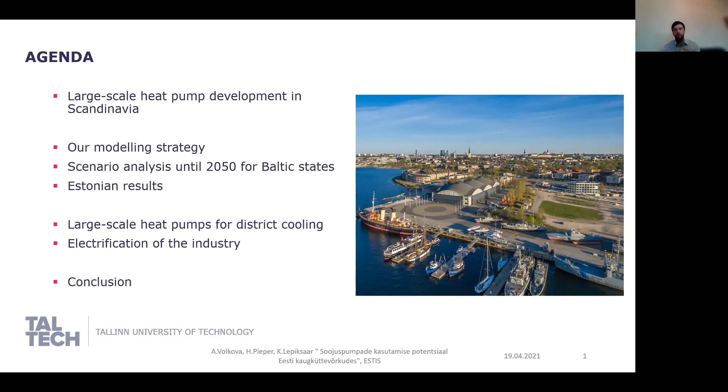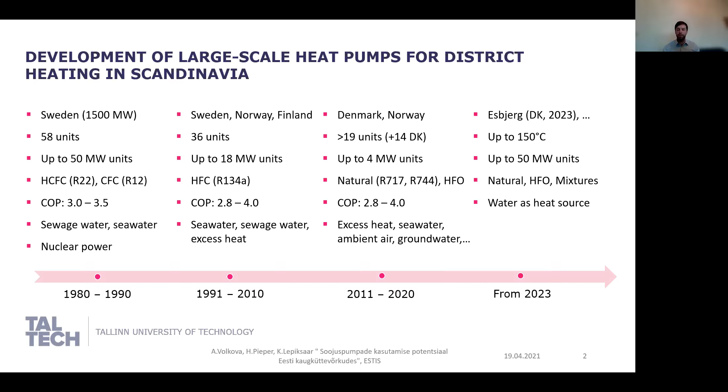And from 2023, more or less, we can expect a new generation of heat pumps, because there are some new compressor types. For instance, in Esbjerg, a city in Denmark, they are planning to replace the coal-fired CHP by 2023 with a 50 megawatt seawater heat pump, using ammonia as a refrigerant and seawater as a heat source. And this, just from the individual single unit, will increase the capacity and the possibilities for heat pumps quite a lot in the future.

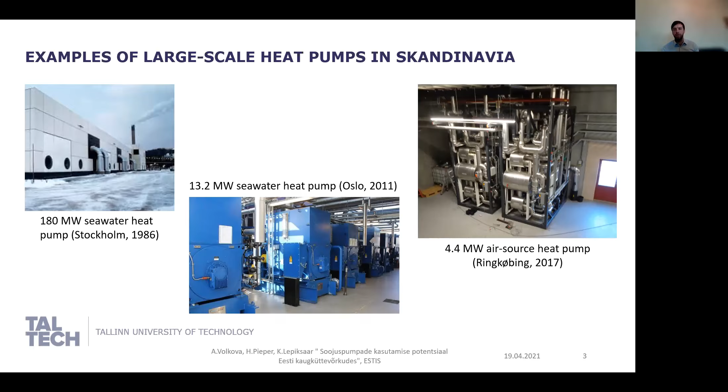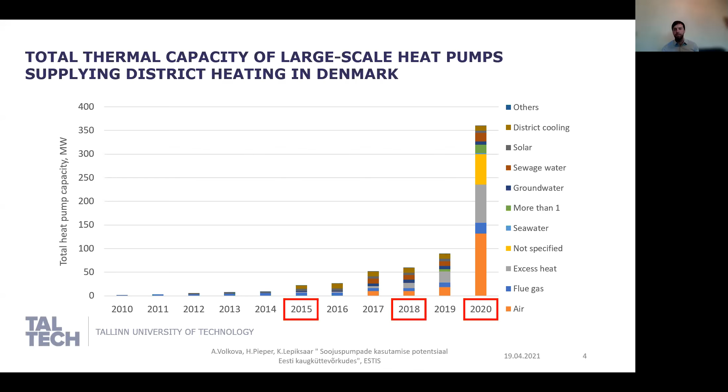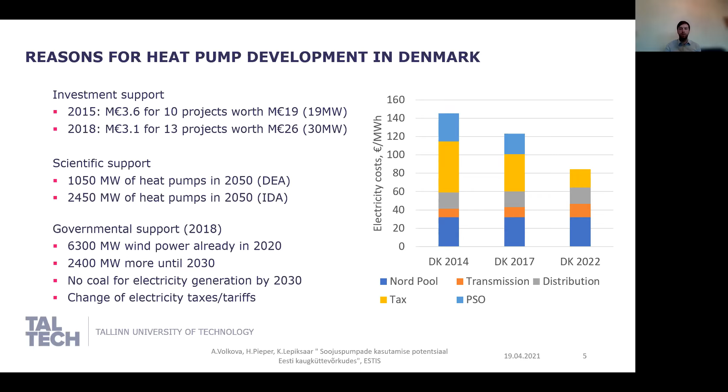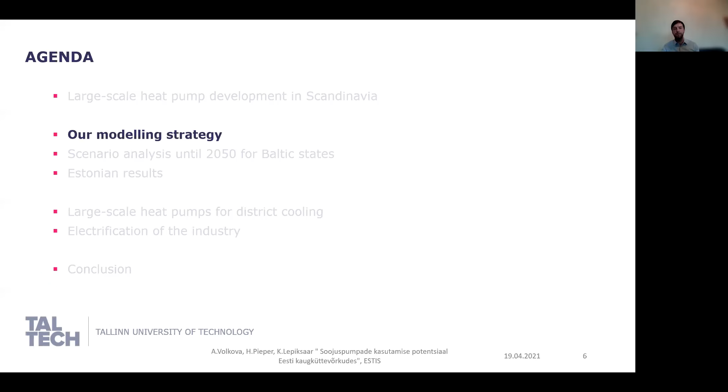So this was about Scandinavia and Denmark. Now I'm going to talk a little bit about the methods and the results from our heat pump report. So our modeling strategy was to analyze the competitiveness of large-scale heat pumps and various heat sources in district heating networks in the Baltic states.

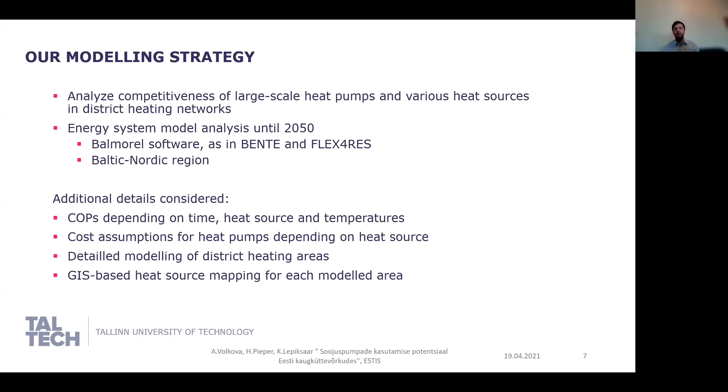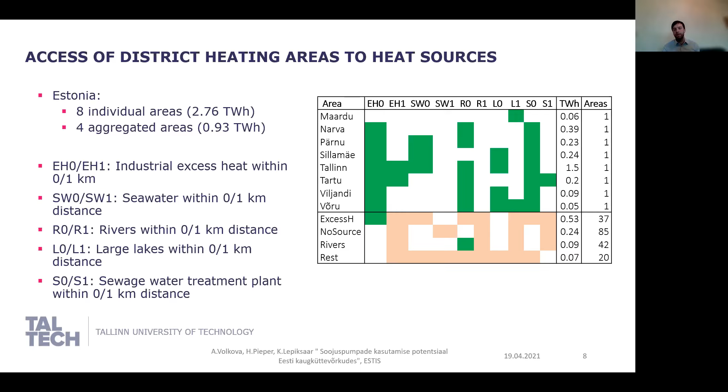So what we then did is we performed a scenario analysis. So we considered 3 different scenarios. The base scenario, which is a socio-economic competition of technologies without any taxes or tariffs applied. Then we had 2 other scenarios. One is the grid tariff scenario, where we consider current electricity grid tariffs in the Baltic states. And then we had an invest support scenario, where we considered a 50% subsidy for new large-scale heat pump projects.

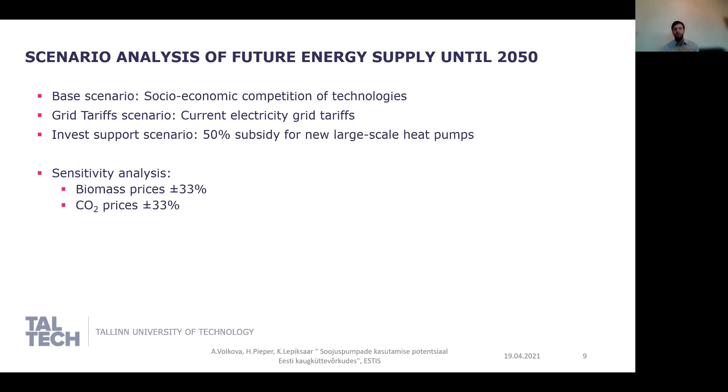We also saw this was one of the measures they used in Denmark, even though the subsidy support was not that large, but we just wanted to investigate how far you can actually go. And then in the sensitivity analysis, we performed variation in biomass and CO2 prices.

So now I'm going to present you the results for the Baltic states. Here you can see the total generated heat for all 3 countries. For the base scenario on the left, for the grid tariff scenario in the middle, and the invest support scenario on the right. And the generated heat from heat pumps you can see in the red boxes. And in the base scenario, this is a socio-economic comparison. By 2050, we expect to have around 54% of the heat supplied by large-scale heat pumps.

And then we can see for the grid tariff scenario, where we apply current grid tariffs, the share for heat pumps will get reduced quite a lot, down to 24%, because it's just so expensive that you would use biomass instead. And then in the extreme invest support scenario, we can see that up to 68% in the Baltic states of this heat could be supplied by large-scale heat pumps.

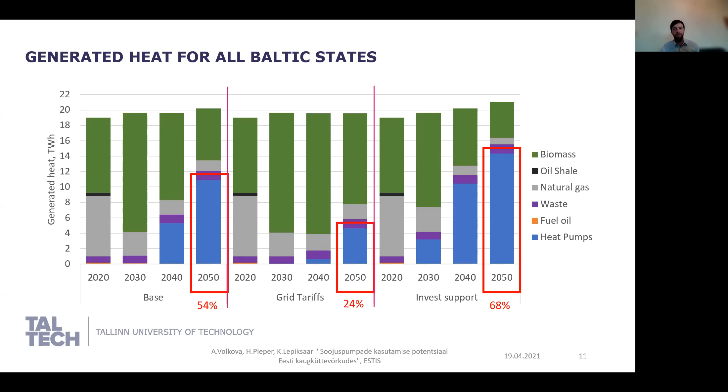And on the next slide, I will show you again these three bars for the supply of heat pumps, but I will just show you which heat sources should be used for that. So this is the same bars, just without all the other disturbing part of the biomass, etc., and waste heat and natural gas. So this is the supply by heat pumps, differentiated by the heat sources used. And the priority is somewhat listed on the right.

So excess heat, of course, due to its temperature and also proximity to the district heating network, has the highest priority actually to use, because you would gain the most, because you also achieve highest COPs, etc. However, the potential is somewhat limited compared to the heat demand in the Baltic states. So you can only maybe generate almost 1 terawatt hour of heat with that.

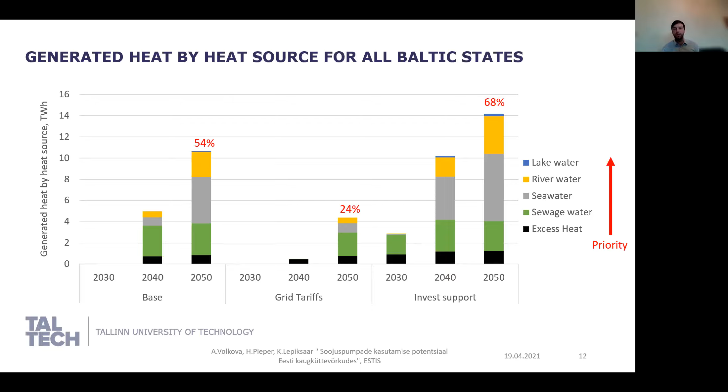And the next source that you should use or could use, because we have plenty of those available, are sewage water treatment plants. And you can see that already in 2040, most of the capacities is actually reached. And then in addition, it is seawater and river water that is used, depending on the location and availability of other heat sources. So in particular, seawater is used a lot, for instance, in the invest support scenario in 2050, covering a large share. And lakes is used very little. So these are more or less the heat sources that play an important role, which is excess heat to a limited extent, and then sewage water, seawater, and rivers.

This is now just the CO2 emissions from our calculations, how they would change. And this is for all three different scenarios in 2030, 40, and 50. And what you can see is that the invest support scenario, which had the highest share of heat pumps implemented, results also in the lowest CO2 emissions, which is good to see. So the heat pumps would also benefit sustainability. And on the other hand, the grid tariff scenario had still the highest share of CO2 emissions, where we had the lowest contribution of large-scale heat pumps.

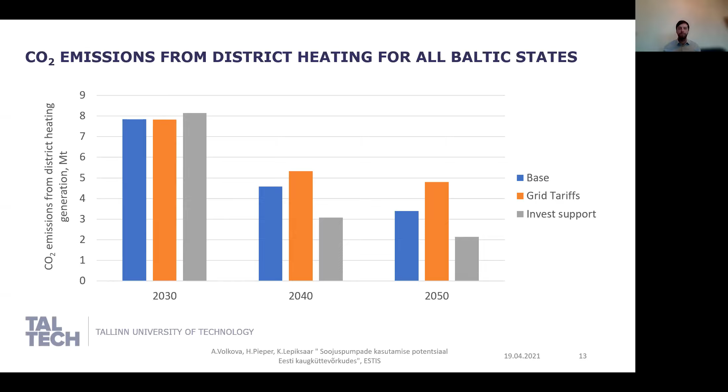Now I'm going to talk about the results just for Estonia. So here you can see a similar plot as before, just for Estonia, with generated heat of almost 4 terawatt hours. And the graph looks somewhat similar, at least the trend, but you can see, for instance, the heat pumps in the invest support scenario would cover quite a large share in 2050, and biomass would almost be not there anymore. Well, still some contribution.

But this is the invest support scenario, where it would be 3.4 terawatt hours that is suggested to be supplied by large-scale heat pumps. Whereas when you have the grid tariff scenario, it's 2 terawatt hours less. And for the base scenario, which considers a socio-economic competition, it would be 2.4 terawatt hours. So it's 2.4 terawatt hours from almost 4 terawatt hours. It's quite a large contribution, which shows that large-scale heat pumps will play a major role, or should play a major role, in the future.

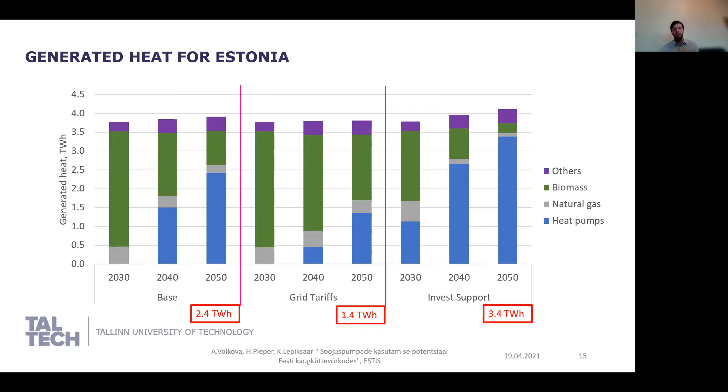Now I would like to show you a little bit the heat source usage in detail for the modeled areas in Estonia. So we have first our 8 individual networks, and then we have the 4 aggregated ones on the x-axis. Then it's heat source usage, how much of the heat source is used, and then with the COP, you get a factor of how much heat you could supply.

Tallinn has the largest share, and it has a large sewage water treatment plant, and of course, the proximity to seawater. That's the main two sources that are suggested to be used for Tallinn in 2050 for the base scenario.

Then we have a mix of sewage water and seawater for different cities. And then we have the excess heat group, where we have a large amount of excess heat that should be used. What I would like to show you are these two, Pärnu and the excess heat group, in a bit more detail in the next slides.

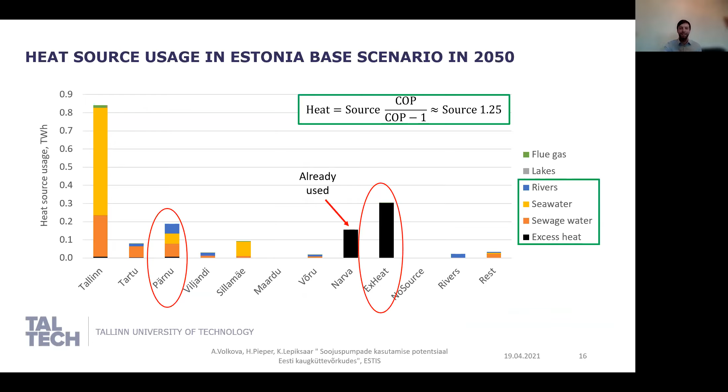You also do have some excess heat sources or boilers or CHPs, but they are not very large in capacity, and the potential of excess heat is not very large. So it would be mainly the river, the seawater, and sewage water.

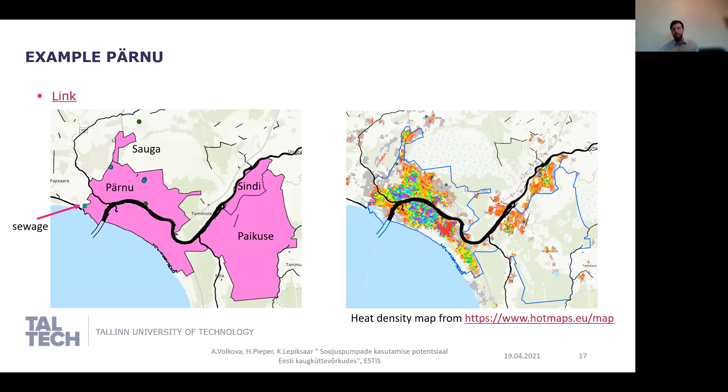However, if you look at Paikuse, you can see it's actually concentrated in two areas, and the other remaining area is just land or agriculture, where you don't actually have district heating, of course. But this is not shown in the GIS map. Just keep this in mind, that for rural areas, the distance can be larger.

Now I would like to show you the aggregated excess heat group, where we had these 37 district heating areas with an accumulated heat demand of around 520 gigawatt hours. And from these 37 district heating areas, there were 22 that had industrial excess heat sources within the district. All the others had only boilers or CHPs in the area of district heating. So these 22 district heating areas had a heat demand of 300 gigawatt hours.

And this is, in this case, the limiting factor, because actually we had 32 industries in all these 37 areas with an excess heat potential of 2,500 gigawatt hours. But since the demand was not large enough, only 300 gigawatt hours could be used.

And different sectors were involved, well, there's a large cement factory, then we have 8 asphalt sites, then we have the chemical sector, wood, food, and then some others. But these are more or less the main areas that were relevant for these 22 district heating areas.

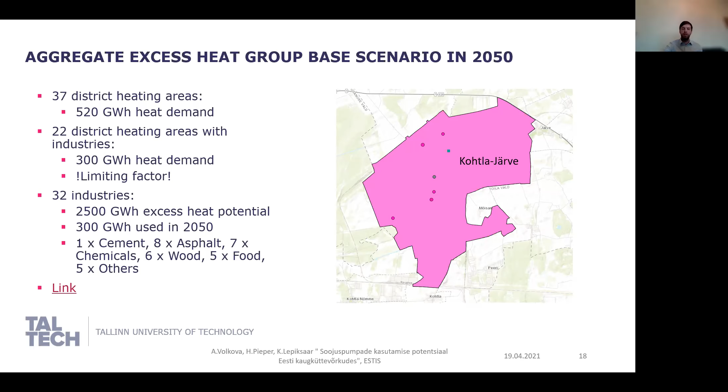Then I would just briefly explain a little bit about large-scale heat pumps for district cooling, and afterwards electrification of the industry. So it's just one example, also in Denmark, in Tårnby, they have...

realized a project where they have a heat pump that can supply 6.5 megawatts of heating and 4.3 megawatts of cooling. It received the Heat Pump of the Year 2020 award from the European Heat Pump Association. It's a win-win for district heating and district cooling clients, because you can share the costs of the investment and also the operation between the heating and cooling customers.

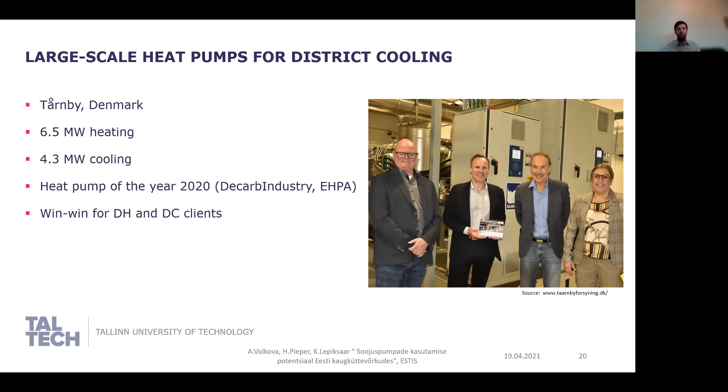District cooling is not new in Estonia. There have been projects that started in Tartu, and there are also plans and some construction in Tallinn.

In Tartu, you can see on the left the network that has been built, and next to it is the Hotmaps GIS map, which shows cooling demand densities. You can see there's actually a good fit between what has been realized and what has been mapped by this project.

For Tallinn, I did the same comparison. There are some 3 potential district cooling regions, and on the right you can see the district cooling potential based on these maps. This time it's maybe not the best fit, but the 60 megawatt area is also somewhat represented. The 10 megawatt area looks like it's moved to the side, but it's maybe next to it.

This 30 megawatt region is not represented, but that's because this is actually a development area. The Hotmaps project considered existing cooling demand areas, and this 30 megawatt is a heat cooling demand that is coming there in the future because they are building this business development district.

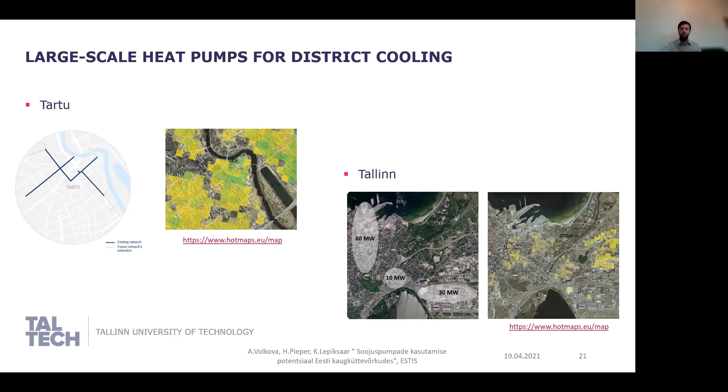Now just about the electrification of industry, very briefly, one slide. Here you can see the primary energy consumption of different industries on the left in the pie chart. You can see that it's mainly chemicals, but also wood and some other, for instance refineries, are large contributors to energy consumption, as well as the cement industry.

I took an example for the wood industry, where you can see on the right the different kinds of processes involved in manufacturing, such as gluing, pressing, drying, staining, or others. In these colors, you can see the required temperatures of these processes.

And in the colors you can see if the heat pump technology to reach this temperature is already on the market, if it's in prototype status, or laboratory scale. There's already quite a lot in this wood sector that you could supply with heat pumps instead of using conventional boilers. That's something to take away, that you could just use heat pumps to provide these temperatures for these different processes.

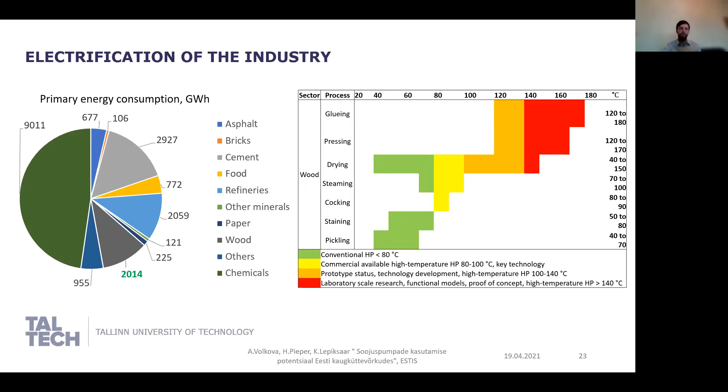So now just some conclusions. First of all, from the scenario analysis, we could see that large-scale heat pumps together with heat storage are essential to reduce greenhouse gas emissions in the future, but current grid tariffs are hindering heat pump implementation.

Regarding heat source usage, excess heat is the most competitive, but it has actually limited availability in Estonia and the Baltic states. The next preferable heat source to use is sewage water, which has a comparably high temperature also in winter compared to natural heat sources, has large capacities, and is near district heating areas.

Then we have seawater and rivers, which you should use depending on availability of those sources, but also of the other heat sources. Our sensitivity analysis has shown that large-scale heat pumps compete directly with biomass, which is even subsidized at the moment, creating a three-way balance between large-scale heat pumps, biomass, and natural gas boilers. These are the three main players in heat supply in the future.

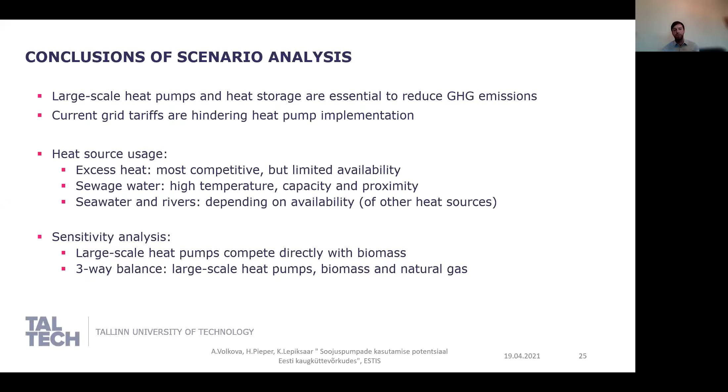Just my last slide. Here we have some potential pathways and drivers for large-scale heat pump implementation in the Baltic states compared to Denmark, which is, for instance, the ownership structure—in Denmark it has to be non-profit organizations.

Regarding temperatures, Denmark has quite low operating district heating temperatures, whereas they are still somewhat higher in Estonia, Latvia, and Lithuania, which we have to work on in order to achieve high COPs. Then there's also the experience and knowledge with heat pumps, and the communication between actors—for instance sewage water treatment plant operators, utilities, or municipalities—to see if there's a possibility to implement such projects.

Then the tax system and tariff structure, where we could see that in Denmark particularly, they reduced the taxes for heating with heat pumps. The last part is the sustainable generation of power—if the electricity we use for heat pumps is not green, then it's not so beneficial for society, because at the moment Estonia still has oil shale used for power generation, and therefore CO2 emissions from the national electricity mix are quite large compared to other countries.

And yes, that's more or less what I wanted to say. So thank you.

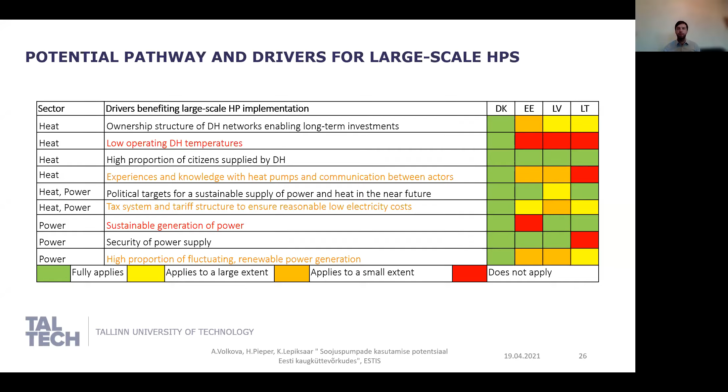Okay, we have some question.

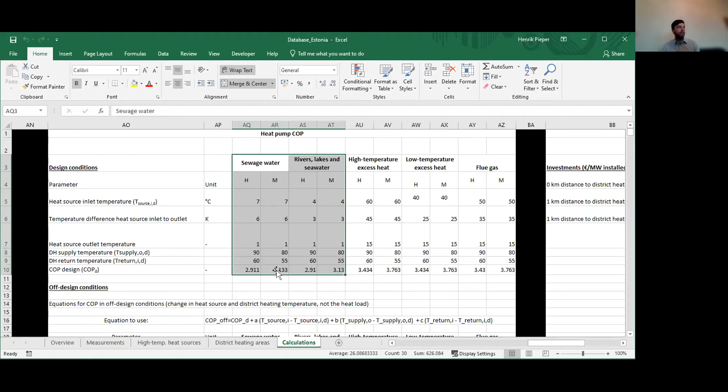And this is for supply temperatures of 90 or 80 degrees C and return temperatures of 60 or 55. And in addition, the heat source temperature is 7 degrees for sewage water and 4 degrees for the natural waters. So with these low temperatures and very high supply temperatures, you reach something around 3. But of course, this is only for the winter condition. You could reach a little bit higher because this is almost the worst case. So you wouldn't have lower COPs during the year, theoretically.